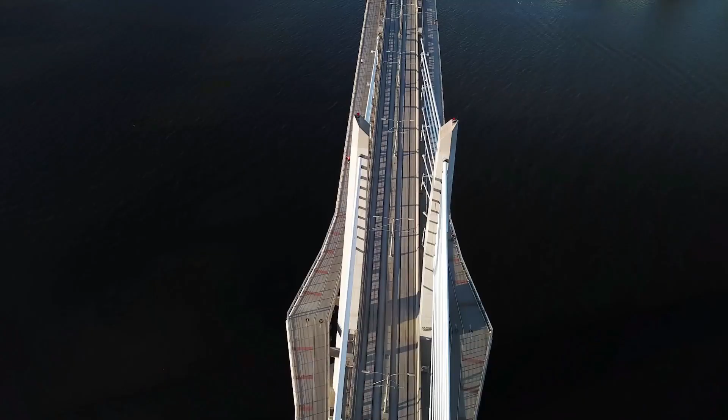Bridges must withstand strong winds, traffic flows, and temperature fluctuations. They are built to last for decades. But sometimes a single mistake can destroy even the most grandiose structure.

This happened with the Tacoma Narrows Bridge in Washington state. It was opened in the mid-20th century. It was one of the longest suspension bridges in the world. It looked futuristic, light, and graceful. But it had an aerodynamic problem.

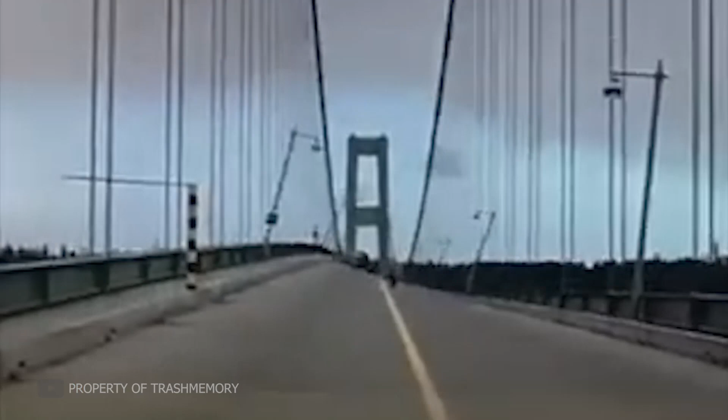In strong winds, the bridge began to sway. At first, the amplitude was small. Then the waves became larger and larger. Eyewitnesses reported that the roadway rose and fell like the surface of water.

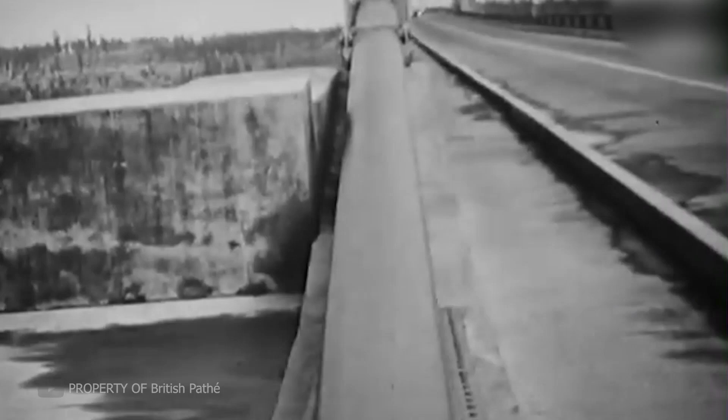In November of the same year, the wind reached a critical speed. The structure went into resonance. The amplitude of the oscillations increased sharply. The bridge twisted and bent at incredible angles. At some point, the structures couldn't withstand it, and it collapsed into the river.

This incident became one of the most studied in engineering history. Since then, bridge designers have started to consider the impact of aerodynamic flows and resonance.

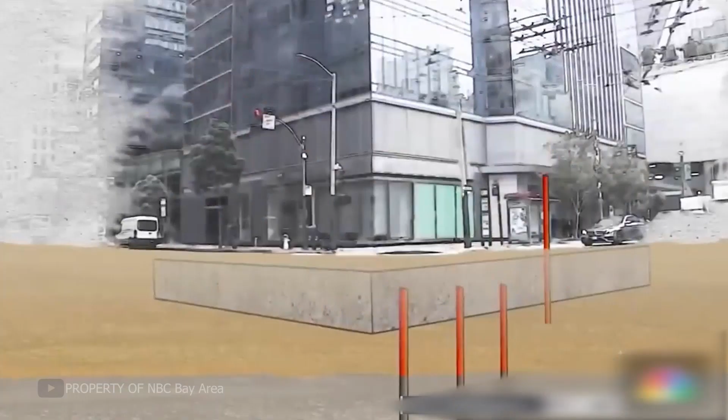Millennium Tower. Imagine you bought a luxury apartment in a skyscraper. The windows offer a panoramic view of San Francisco. Marble floors, glass walls, designer interior. And then you find out that the building is slowly tilting and sinking into the ground. We're talking about the Millennium Tower, one of the most expensive skyscrapers in the city.

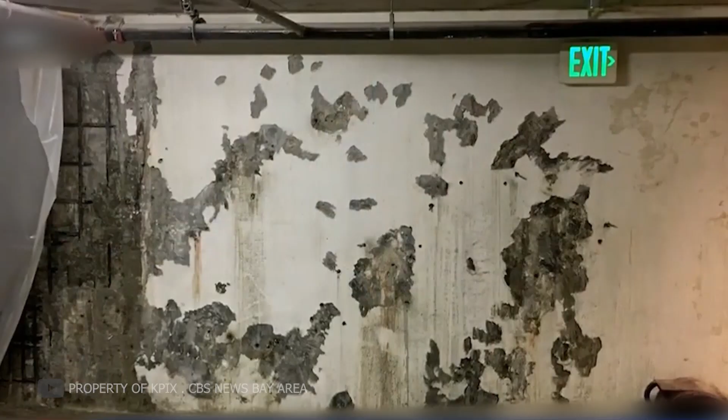It was built in the early 2000s. The height is over 50 floors. Apartments cost tens of millions of dollars. But shortly after opening, residents began to notice strange things. Cracks appeared on the walls, doors stopped closing, glass started pressing against the frames, and in some apartments, they simply shattered. It turned out that the building is sinking.

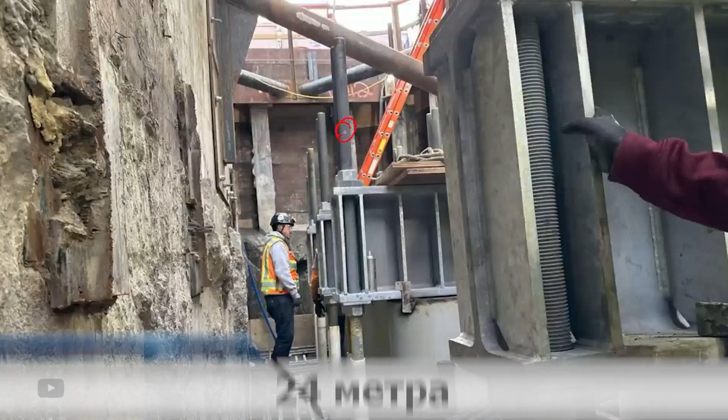Engineers discovered that the foundation is not on bedrock, but on soft soil. The piles go down only 80 feet, but for such a height, a minimum of 120 was required. Just a few years after construction, the skyscraper had sunk 2 feet and tilted 20 inches.

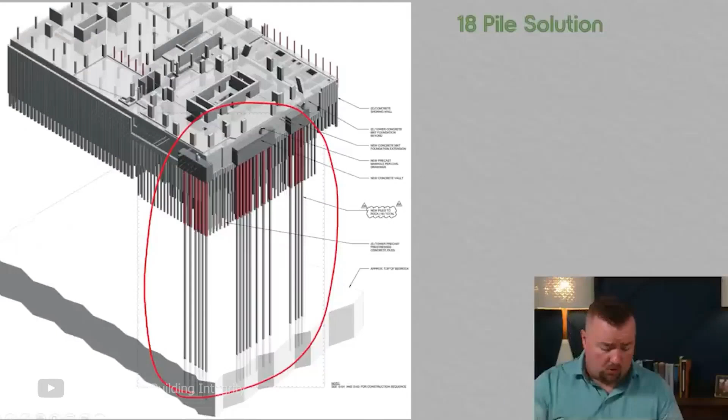The residents filed a lawsuit against the developer. City authorities demanded that the structure be reinforced. Builders began work on stabilizing the foundation, but the process turned out to be more complicated than expected. Any intervention could only make the situation worse. At the moment, the skyscraper continues to sink. How long it will stand, no one knows.

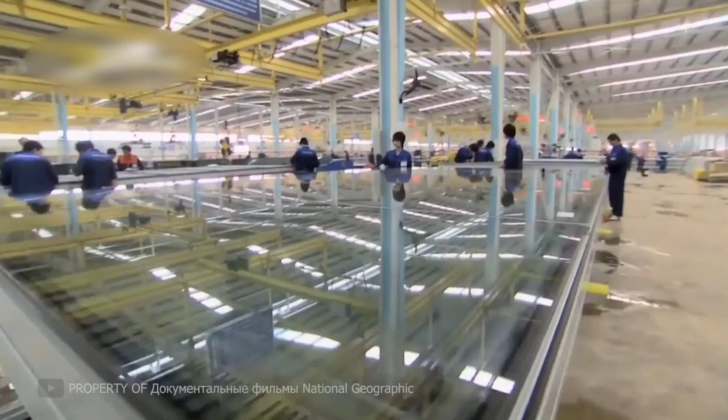A glass nightmare. Modern skyscrapers are often built with glass facades. They look stylish, provide a lot of light, and make buildings appear lightweight. But sometimes glass can turn a building into a deadly trap.

This happened in London with the Walkie-Talkie skyscraper. This building has an unusual shape, and its glass facade has a concave surface, but the architects did not consider one important factor: sun rays. On sunny days, the glass acted like a giant lens, collecting and directing light downwards, right onto the street.

As a result, the temperature in that area rose so much that parked cars began to melt. The bodies of the cars warped, and plastic elements fell off. People passing by felt an intense heat.

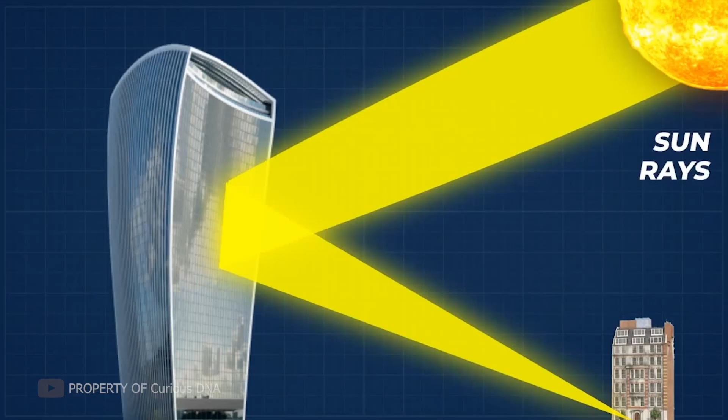After several complaints, the problem had to be addressed. Engineers installed special protective panels to diffuse the light. Without this, the part of the street under the skyscraper would have remained dangerously hazardous.

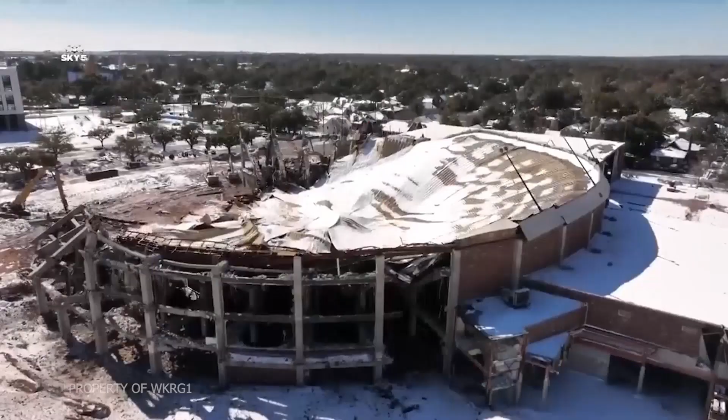Stadium collapse. Stadiums must withstand enormous loads. Tens of thousands of spectators gather there. Concerts, competitions, and rallies are held there. But if there is a flaw in the design, a disaster can occur at any moment.

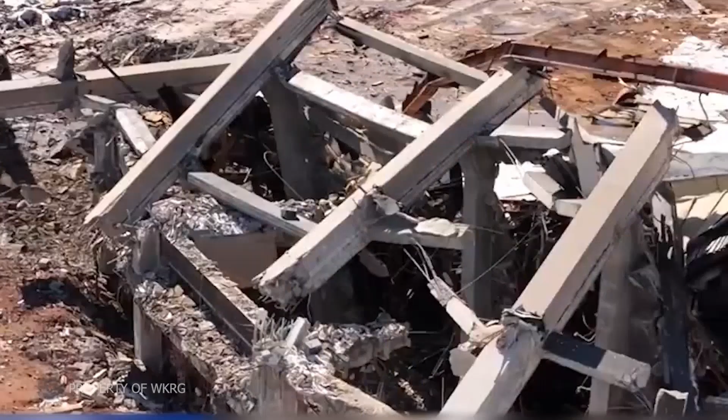The investigation revealed that the designers miscalculated the load. The roof's connecting joints were weakened. Under normal conditions, they could support the weight of the structure. But once the additional load of snow was added, the system failed.

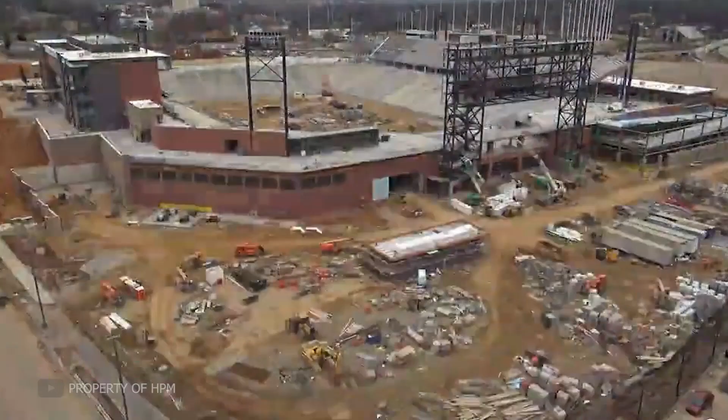After the disaster, the stadium was closed for reconstruction. The supports were reinforced, and the load distribution system was changed. But even after reopening, people were afraid to visit it for a long time, fearing new collapses.

The team provides a guarantee for their work, which is very important in our time.

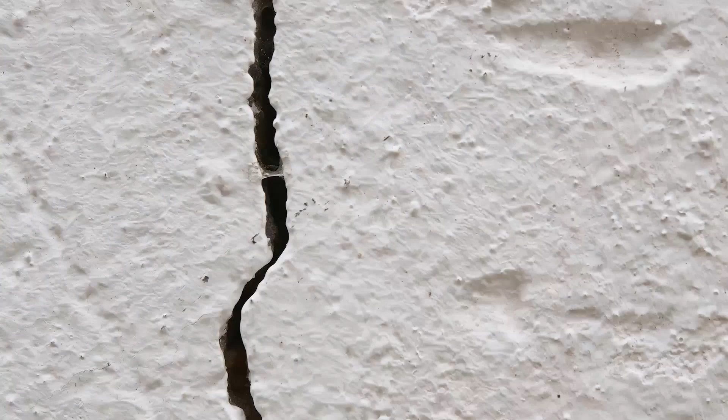The office complex that was cracking. When cracks appear in a new building, it's a serious signal. But if a building is literally splitting apart, the situation becomes critical.

In South Korea, a modern office complex called Sky Building was constructed. It was supposed to become a symbol of progress and technology. But soon after opening, problems began to appear. First, small cracks, then loud bangs resembling explosion sounds. Office workers complained that the floor was vibrating. New damages appeared on the walls.

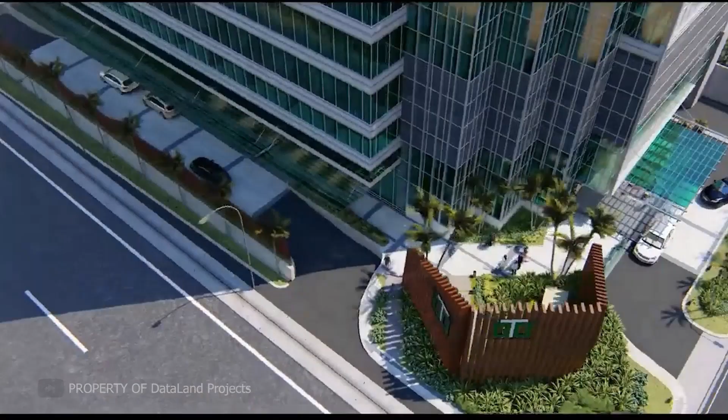Engineers began an investigation and discovered the problem. The columns couldn't withstand the load. There were gross errors in the design. Some load-bearing elements were weakened due to incorrect weight distribution.

Authorities took urgent measures. The complex was closed, people were evacuated, and reinforcement of the structure began. But the building had already lost its reputation. Many companies refused to rent, and insurance companies did not want to insure it.

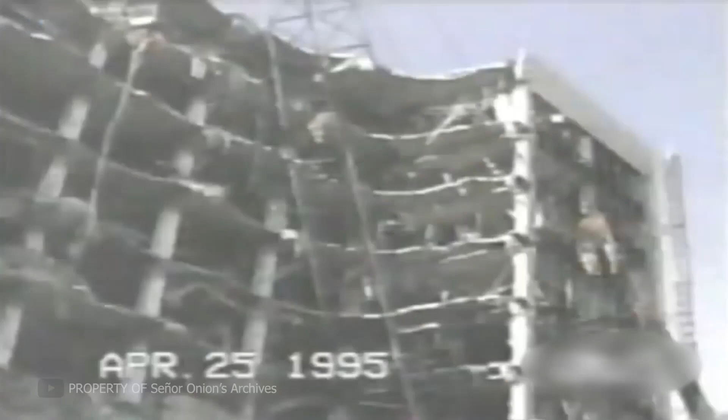The shopping mall that collapsed. Shopping malls are built to withstand enormous loads. Thousands of people pass through every day, and hundreds of stores operate. But if there are errors in the construction, the building can turn into a deadly trap.

This happened in South Korea in the 1990s. Sampoong Department Store, an elite shopping center in Seoul. A 5-story building, luxurious boutiques, a huge food court. On the day of the disaster, there were over 1,500 people inside.

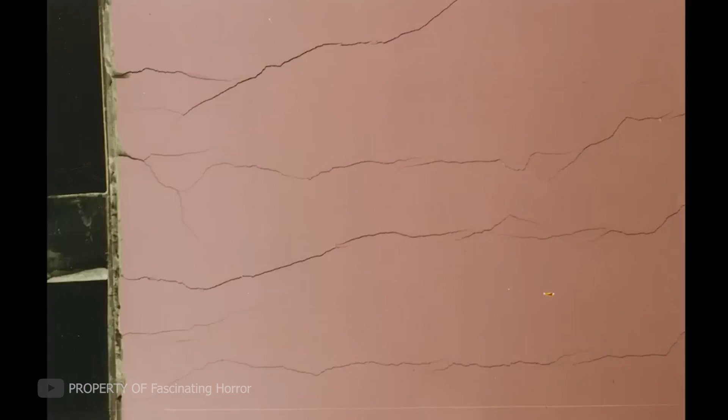It all started with cracks in the ceiling. Workers noticed them a few days before the collapse. Then strange sounds began to be heard, similar to the screeching of metal. But the management of the center ignored the warning.

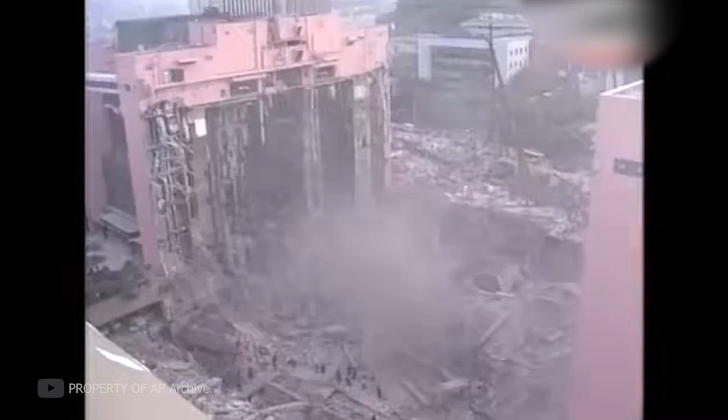Suddenly, the structure gave way. A huge part of the building collapsed inward like a house of cards. The collapse lasted only a few seconds. Hundreds of people were trapped under the rubble.

The investigation revealed that the cause was negligence. Weak concrete columns were used during construction, and additional floors were added on top, which were not in the original design. The structure simply couldn't withstand the overload.

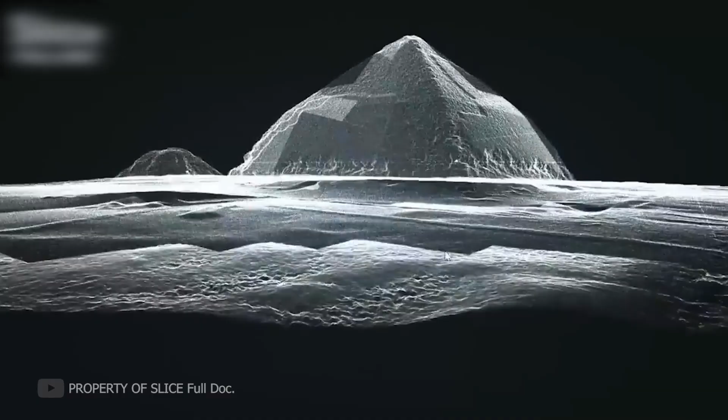The broken pyramid. In Egypt, there are dozens of ancient pyramids. They have survived thousands of years, earthquakes, and sandstorms. But there is one mysterious structure that remains unfinished: the Bent Pyramid in Dahshur.

It attracts attention with its strange shape. The lower part has one angle of inclination, while the upper part has a completely different one. Why did the builder suddenly change the design? Scientists believe the reason lies in engineering miscalculations.

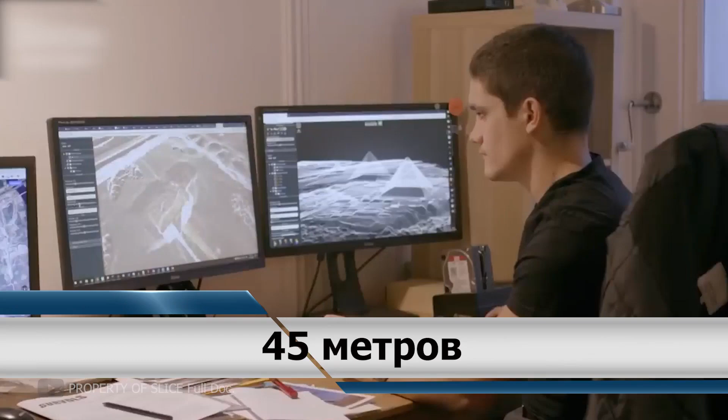Initially, the pyramid was being built at an angle of 54 degrees. But when the height reached 150 feet, cracks appeared in the structure. The foundation couldn't support the weight of the massive stone blocks. To prevent a disaster, the builders changed the angle of inclination to 43 degrees. This allowed them to reduce the load and complete the construction.

But this shape made the pyramid unconventional, and soon it was decided to completely abandon this method. This mistake became an important lesson. After this, engineers in ancient Egypt began building pyramids with more gradual slopes, which allowed them to stand for millennia.

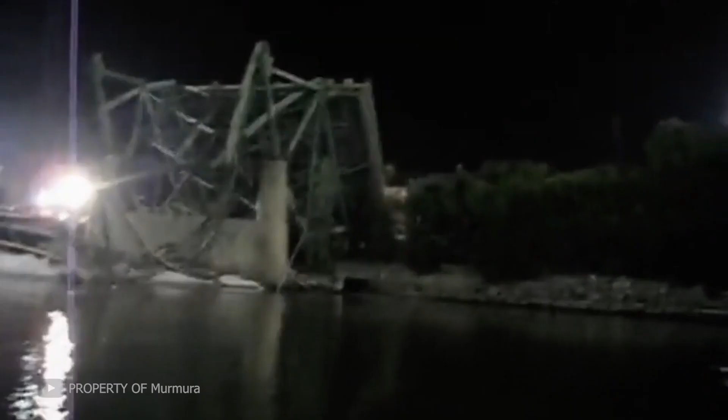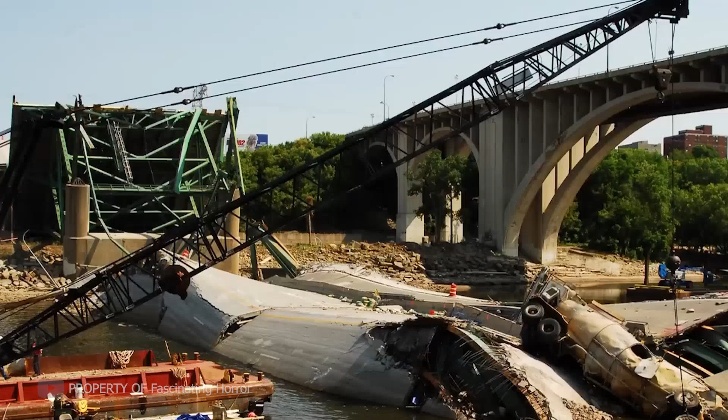The bridge that couldn't hold. Automobile bridges are designed to withstand loads for many years. But sometimes a small error in calculations can lead to disaster. This happened in 2007 in Minneapolis: the 35W Mississippi River Bridge, an important bridge over the Mississippi River. Tens of thousands of cars crossed it daily.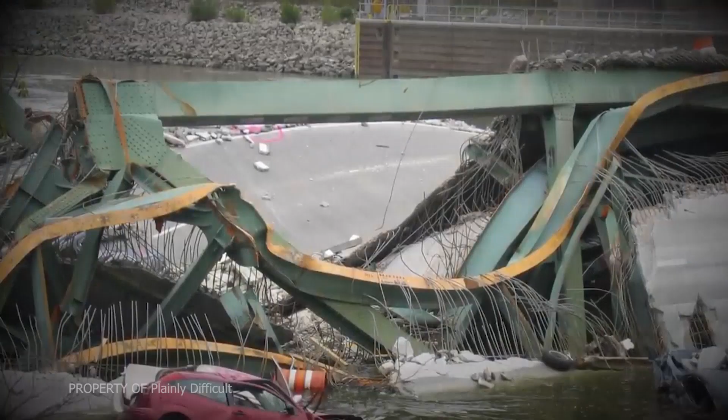But one evening, a sudden crash was heard, and the bridge collapsed right into the water. At the time of the disaster, there were over 100 vehicles on it. Cars were falling from a height of 80 feet. Some were instantly trapped under the rubble of metal and concrete.

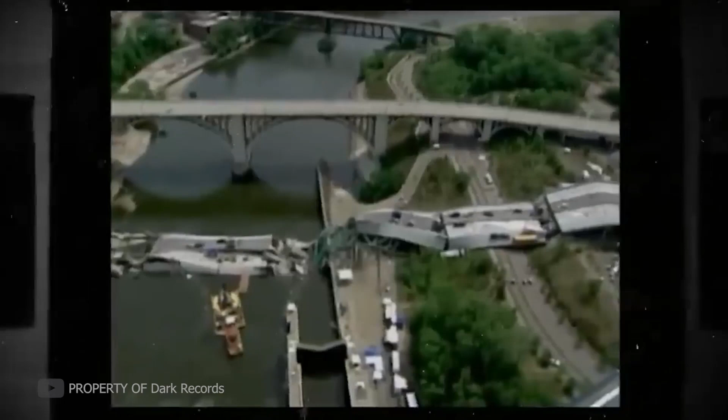The investigation revealed that the cause was in the design of the connecting plates. They turned out to be too thin for such loads. Over time, the metal began to deform and eventually could not withstand the weight of the structure. After this tragedy, bridges across the country began to be inspected for hidden defects.

Destroyed airport. Airports are complex engineering structures. Each terminal must withstand a huge flow of passengers, luggage, and climatic loads. But even here, there can be mistakes that may lead to disaster.

In the 2000s, a new terminal was opened at Charles de Gaulle Airport in Paris. It was supposed to be an architectural masterpiece, with modern design, glass walls, and smooth lines. But a few months after opening, part of the roof collapsed right into the waiting area.

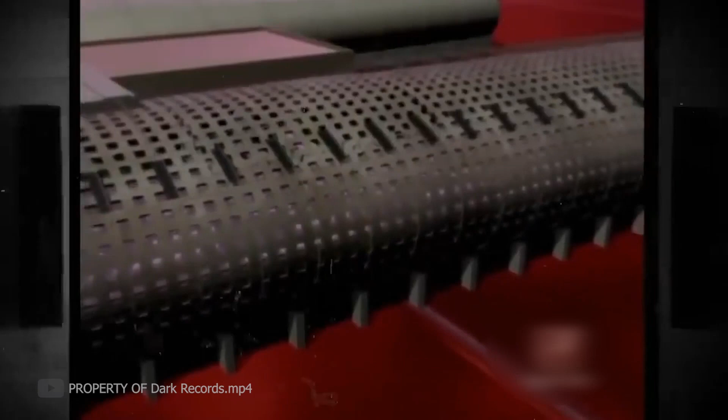The problem was in the construction. The arch supports holding up the roof were not strong enough. The materials couldn't withstand the load, and temperature fluctuations made the situation even worse. As a result, one of the sections of the terminal simply fell apart.

After that, the airport had to be urgently reinforced. Now its construction is reliable, but the collapse incident served as a reminder that even in the most modern buildings, there can be serious engineering miscalculations.

A house that couldn't withstand the wind. When residential complexes are built, they are expected to last for decades. But sometimes even a small mistake can make a building vulnerable.

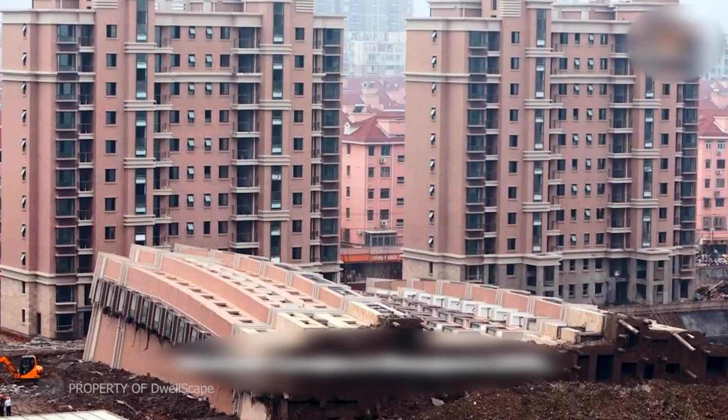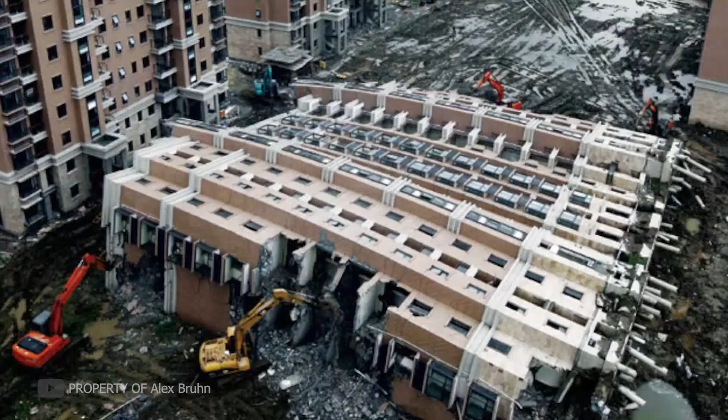In the 2000s, a luxury residential complex called Lotus Riverside was built in Shanghai. Ten high-rise buildings, modern architecture, convenient location. But one night, one of the buildings simply toppled over. Surveillance cameras captured how the building slowly leaned and then, with a loud crash, fell to the ground. It remained almost intact, just lying on its side like a giant domino.

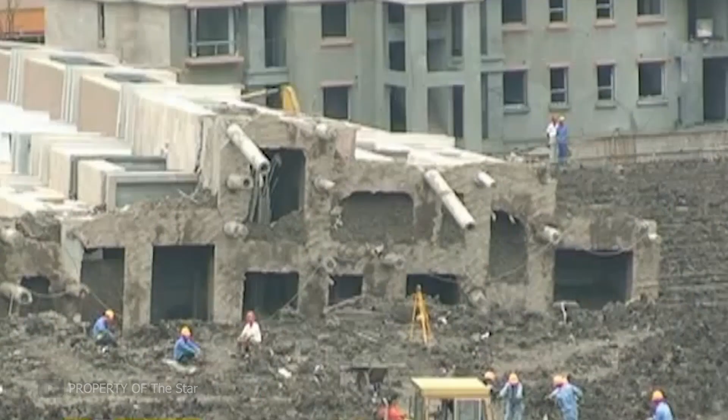The investigation revealed that the cause was the foundation. During construction, the builders dug a pit next to the building but did not reinforce it. The rains washed away the soil, and the building was destroyed. This disaster was a shock to the construction industry. After that, China began to more strictly control foundation work.

A skyscraper deformed by the wind. Modern skyscrapers withstand strong winds. They are designed with aerodynamics, calculated loads, and oscillations in mind. But sometimes even the best technologies cannot fully protect the structure.

This happened in Dubai with the Cayan Tower, one of the most unusual skyscrapers in the world. Its height is over 1,000 feet. Its distinctive feature is its twisted shape. Each floor is rotated a few degrees relative to the previous one. This creates a spiral effect and makes the building look impressive.

But a few years after construction was completed, engineers noticed alarming signs. Due to the design features and wind loads, microcracks began to appear on the upper floors. The windows were experiencing high stress.

In buildings of such height, special dampers are usually installed, but due to the shape of the Cayan Tower, some calculations turned out to be insufficient. The structure continues to withstand the loads, but experts are monitoring it with special attention. Any slightest changes in the framework can lead to serious consequences.

An unsuccessful underground tunnel. Underground tunnels must be reliable. They are built to last for decades, withstand traffic flows and ground vibrations. But sometimes a project can turn into a disaster even before completion.

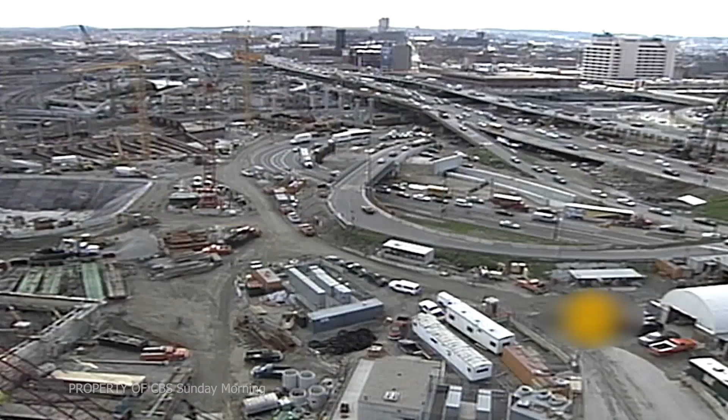This happened in Boston, one of the most expensive transportation projects in U.S. history. It is a system of underground tunnels designed to alleviate road traffic. But from the very beginning, the construction faced problems. The first mistake was the use of poor quality concrete. The tunnel walls began to crack even before the work was completed.

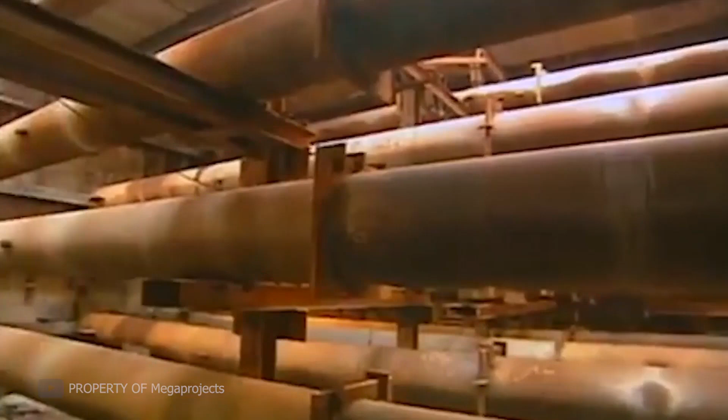Then there was a water leak. The joints between the panels could not withstand the pressure. But the serious disaster was the collapse of part of the structure. One of the concrete slabs, weighing over 10 tons, suddenly fell onto the roadway. Engineers conducted an investigation and found that the cause was poor quality fastenings. The project required urgent reconstruction, and its final cost exceeded the initial estimates several times over.

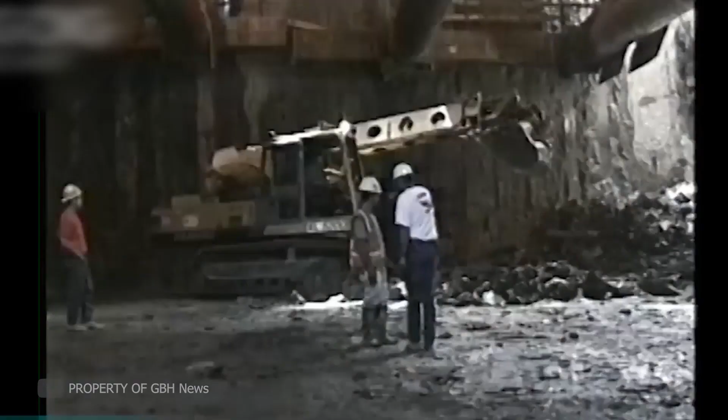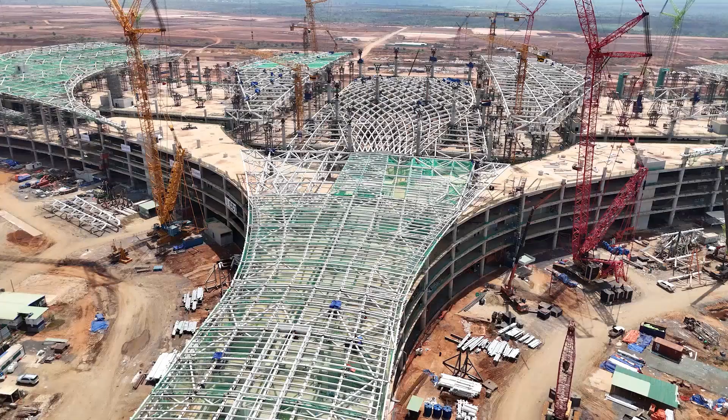Record-breaking ghost hotel. Skyscrapers are usually built over several years, but sometimes a project turns into a long-term construction that will never be completed. This happened with the Ryugyong Hotel in North Korea. This gigantic building is over 1,000 feet tall. It was supposed to become the most luxurious hotel in the country.

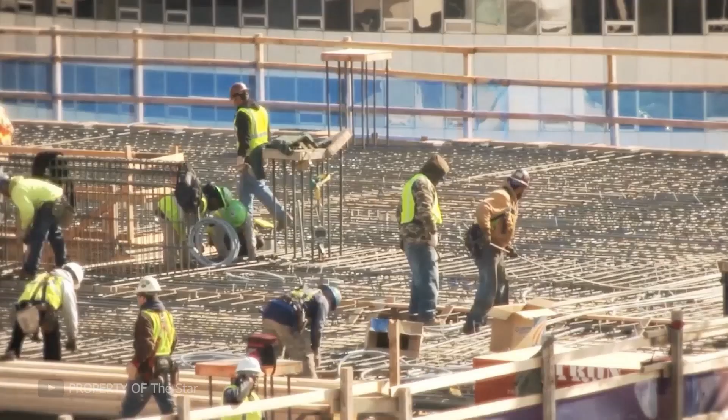But already during the construction phase, the project encountered serious problems. Firstly, the funding was suspended several times. But the main problem was engineering errors. The building's design turned out to be too complex, and the load on the frame was distributed unevenly. Additionally, outdated technologies were used, and the quality of the concrete did not meet global standards.

As a result, the building stood unfinished for several decades. Only recently was it clad in glass, but the question remains whether it will ever be completed.

Citigroup Center, the tower that swayed. When building skyscrapers, it's important to consider not only the height but also the resistance to loads. The slightest error in calculations can lead to disaster.

Citigroup Center is one of the most recognizable skyscrapers in New York. Its distinctive feature is the massive columns located not at the corners, but at the center of each side of the building. This allowed a church to be placed directly underneath it.

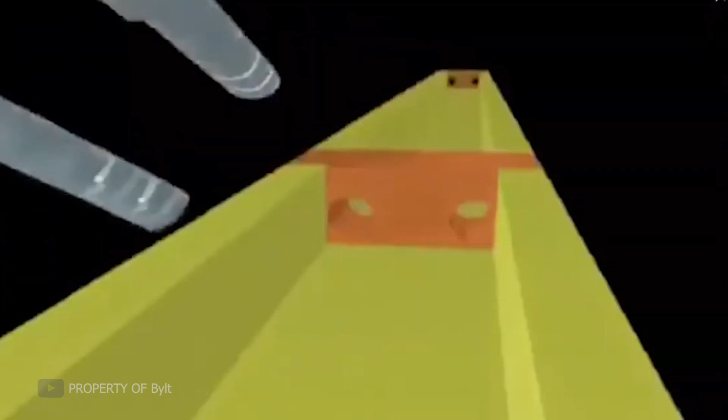But a year after construction was completed, engineers discovered a terrifying mistake. The design did not account for how the wind would affect the building. Under certain conditions, a strong hurricane could cause critical oscillations, and the tower could collapse.

The problem was resolved, but the work was done secretly. Every night, builders reinforced the structure's connections. If the information had leaked to the press, it could have caused panic. This case became one of the most famous examples of hidden engineering errors in skyscrapers.

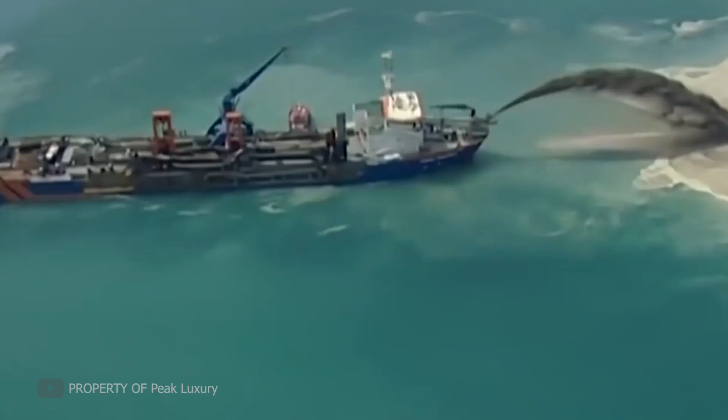Dangerous skyscrapers in the water. Construction on artificial islands is a complex task, especially when it comes to high-rise buildings. The slightest error in calculations can lead to disaster.

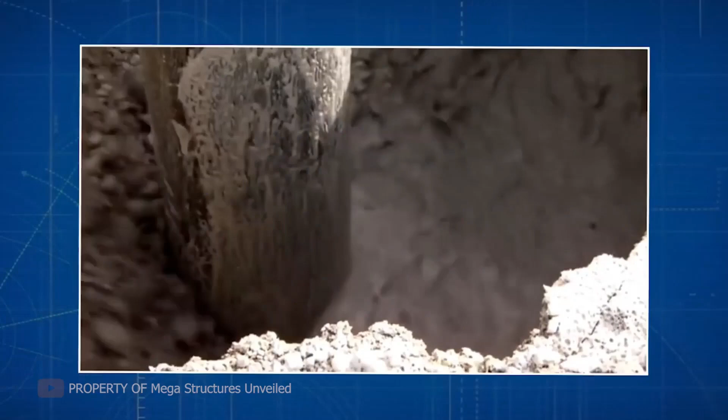In Dubai, a project was created: Palm Islands, artificial archipelagos where hotels, residential complexes, and skyscrapers are being built. But a few years after the completion of construction, problems began to appear. The ground on which the buildings stand turned out to be unstable. The foundations began to settle.

Some structures developed microcracks. Moreover, due to miscalculations in design, water began to erode sections of land. Today, scientists and engineers are monitoring these changes. But the question remains open: will this mega project last as long as planned?

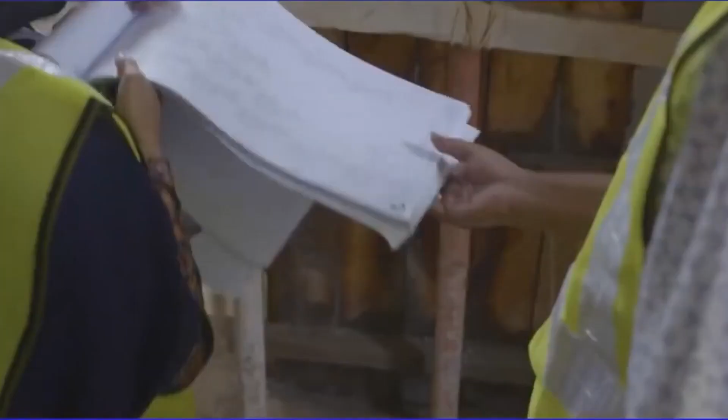Destruction under load. Buildings where thousands of people work must be as safe as possible. Any construction error can lead to tragedy. This happened in Bangladesh in 2013.

In the city of Savar stood the 8-story Rana Plaza building. It housed shops, offices, and garment factories. Thousands of workers came here daily.

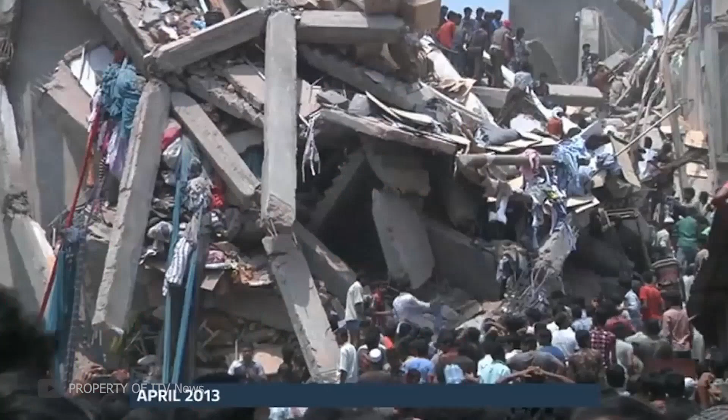The day before the disaster, cracks appeared on the walls. Some employees refused to enter the building, but the factory owners ordered them to continue working. And the next morning, the structure couldn't hold. The building collapsed in a matter of seconds.

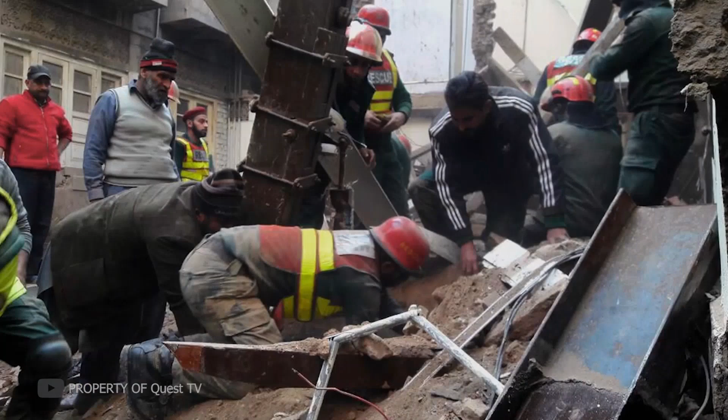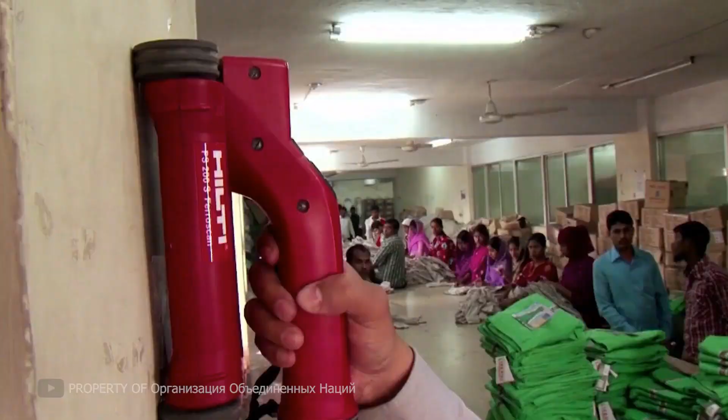The cause was gross violations during construction. The foundation did not meet standards, and the load from the heavy equipment was too high. This tragedy became one of the largest man-made disasters in the history of Bangladesh. After it, new construction standards were introduced in the country, but the question remains: how reliable are the old buildings?

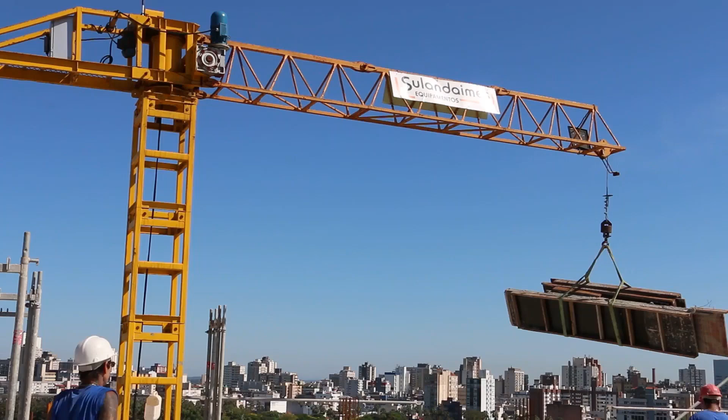Concrete that cracks. The quality of materials is one of the key factors in construction. Even the most well-thought-out structure can collapse if the concrete is not strong enough. This happened in the United Kingdom with the Apollo House skyscraper.

The building was erected in the mid-20th century. It was a standard residential complex designed for thousands of people. But after a few decades, alarming signs began to appear. The walls were covered with cracks, and in some places, concrete blocks were chipping off.

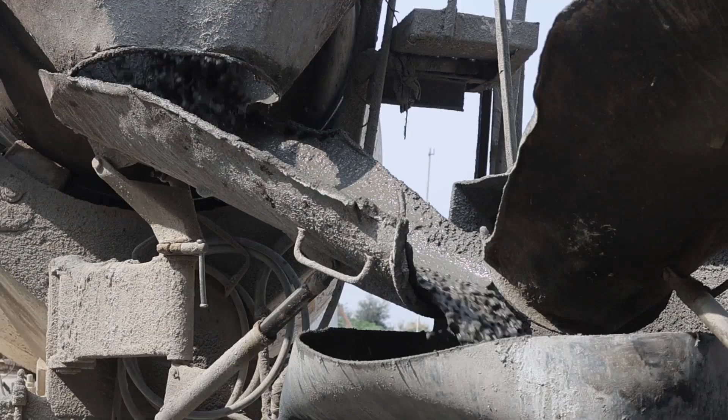Engineers conducted a study and found that low-quality concrete was used during construction. Over time, the material began to deteriorate due to moisture and temperature. As a result, the building was declared hazardous. Residents were relocated, and the complex itself was demolished. This case served as a reminder that even concrete can fail if construction technologies are not followed.

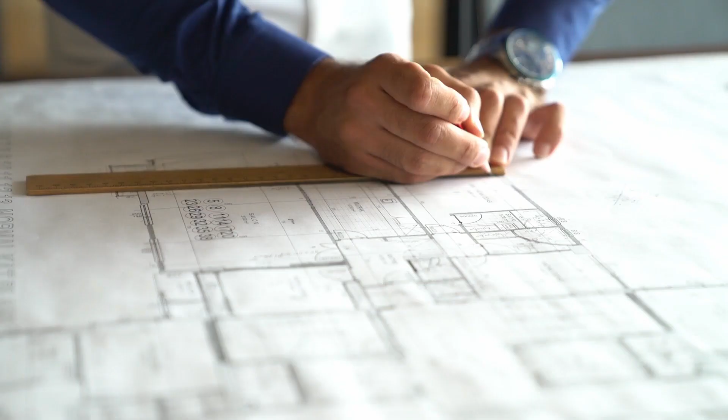The tower, the most expensive unfinished building. Some projects cost billions of dollars. They are supposed to become symbols of engineering progress. But sometimes grand constructions turn into unfinished projects.

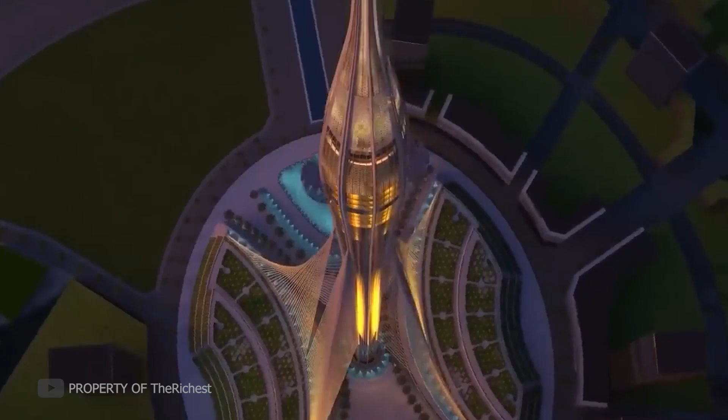This is what happened with the tower project in Dubai. This building was supposed to become the tallest in the world, surpassing the famous Burj Khalifa. It was planned that its height would exceed 3,000 feet. But problems arose during the construction process.

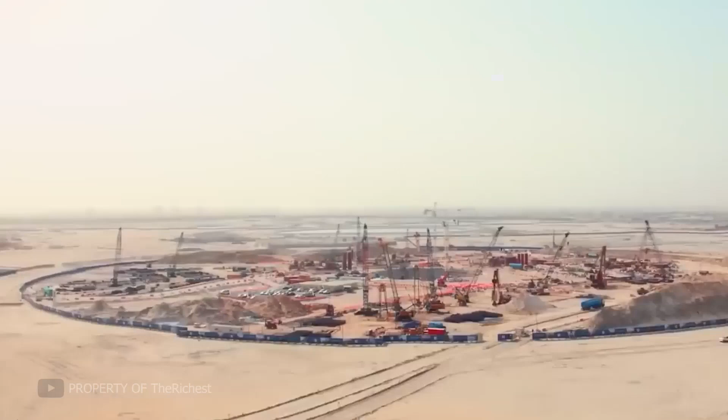First, the cost of the project increased every year. Second, the engineering calculations turned out to be more complex than anticipated. The ground on which the building was being constructed required additional reinforcements. As a result, the construction was halted. Today, at the site where the tower was supposed to stand, only the foundation and a few unfinished structures remain.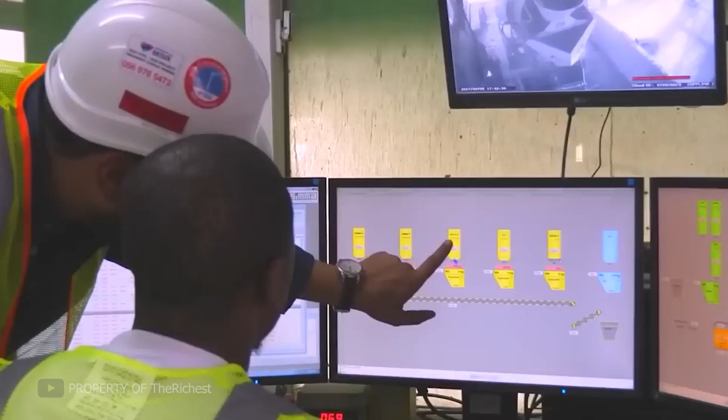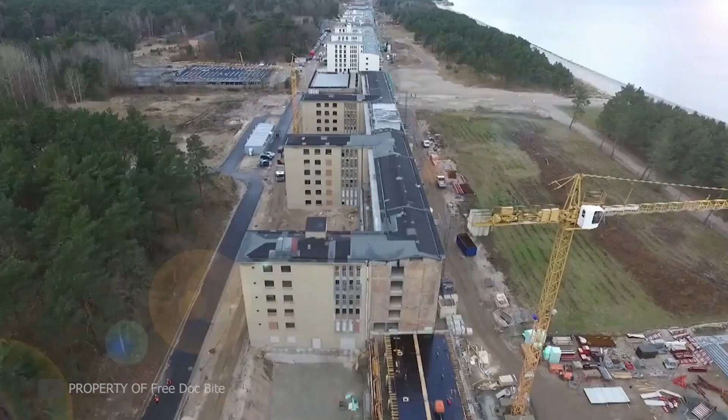A residential complex that no one accepted. Sometimes buildings are constructed with grand plans, but in the end, they remain empty. Prora is a huge residential complex in Germany.

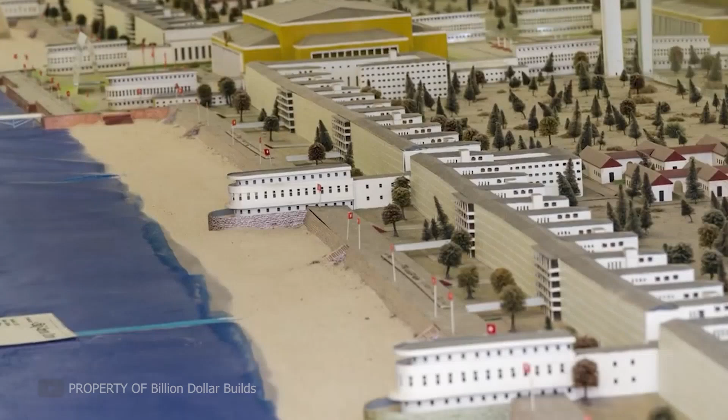Its construction began in the 1930s. It was planned to accommodate tens of thousands of people. It was supposed to become one of the largest resort complexes in Europe. But after the construction was completed, Prora was never used as intended.

The war changed the plans, and the buildings remained empty. Decades later, there were attempts to turn them into hotels, residential apartments, and museums. But most of the complex is still uninhabited. This case shows that even the largest projects can turn into ghost towns.

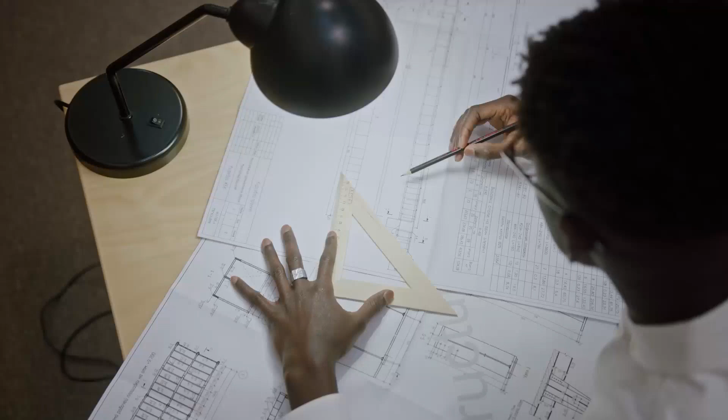Engineering mistakes that are repeated. Construction is a complex process. Engineers use the latest technologies and perform thousands of calculations. But despite this, mistakes continue to be repeated.

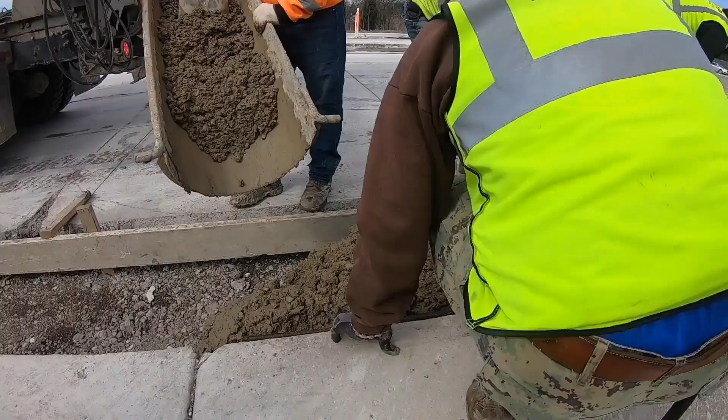The same problems have plagued the construction industry for decades: insufficient foundations, miscalculations in loads, use of poor quality materials, ignoring natural factors. We see skyscrapers that lean, bridges that collapse, and buildings that cannot support their own weight. Each case has its own cause. But the main question remains: do we really learn from our mistakes?